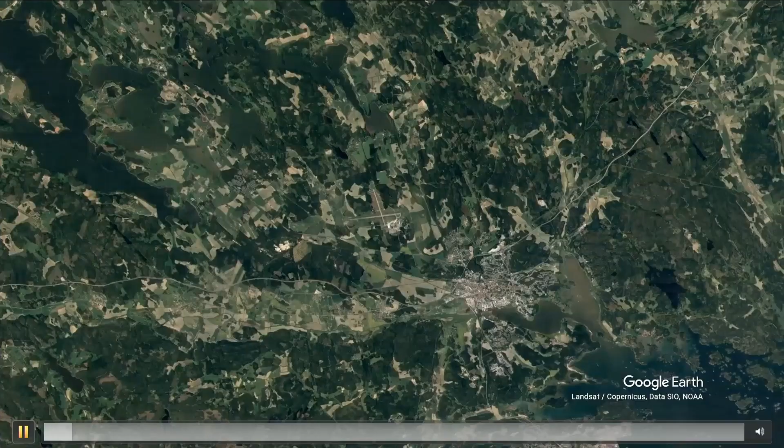Welcome to Nyköping and Skavsta. Skavsta is located just outside Nyköping, about an hour south of Stockholm. The area today is best known for the international airport, but it's about to undergo a transformation. We are developing an entire business area for more than 10,000 jobs, and a new train station with a travel center. The travel center will connect the airport, train and bus, strengthening Skavsta as an important regional node with interconnections in a greater metropolitan area.

For Explore Skavsta as a real estate developer, together with the municipality and the region, this is a chance to be innovative for real, to embrace the future way of making business within the planetary boundaries, and to form a working environment with care and qualities that in itself will become an attraction for a diversity of people and interests. We have already set the basic outline for the area, especially the infrastructure, in a planning program.

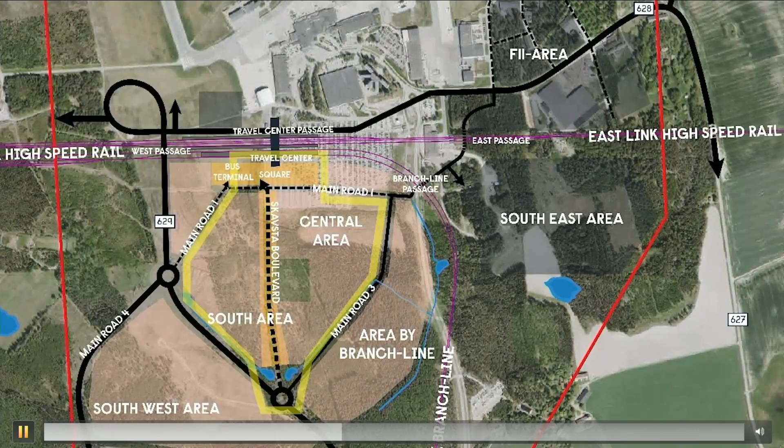The station for the East Link will be an important element for the area. The square outside on the south side therefore becomes a central place. The track and the station are built by the Swedish Transportation Administration and are fixed requirements in terms of height and location. We have also generated vision boards to set the direction for the kind of environment we are looking for. Now it's time to conduct an architectural and urban study in order to design the core elements of this future society and to develop a well-founded architectural vision of the environment we want to create.

The project area today consists of a parking lot and a relatively flat forest land. A height of rock outcrops just east of the future Skavsta Boulevard is preserved and provides a view of the area. The diamond structure of the main roads is given, but the location of the roads is not completely fixed and must therefore be adapted to, for example, travel centers and roundabouts.

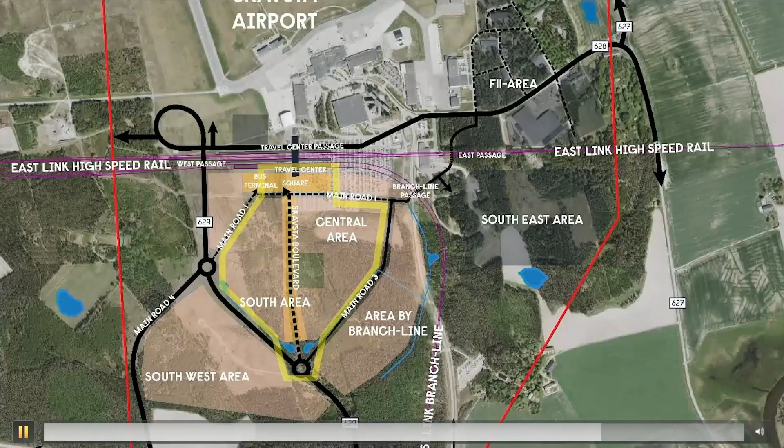The focus of the competition task is to transform the vision of innovative Skavsta into architectural solutions. Our questions concern the concepts of both the transit and the business areas. On site, we are especially looking for solutions on a detailed level for the central future public spaces, such as the Skavsta Square and the Skavsta Boulevard with surrounding blocks.

In Skavsta, we're trying to forecast a development for the next 20 years. For this purpose, your contribution is of great value for us. Welcome to Nyköping and to Skavsta.

Welcome. My name is Tobias Osmark. I'm an architect and a strategist at Nyköpings kommun. After this overview, I think there remain two basic questions.

The first one is very general: why compete in architecture? Competition is for sure very deeply rooted in the subject of architecture, but for us, this question really matters. We don't have an ultimate best solution ready at hand. We need your different professional angles, and in this case, your whole capacity as architects and city planners. Competition is not just about fulfilling the limited program, it is a chance to capture and reveal the whole complexity of architecture. Europan has its own tradition for competitions in this sense, which we are proud to be part of.

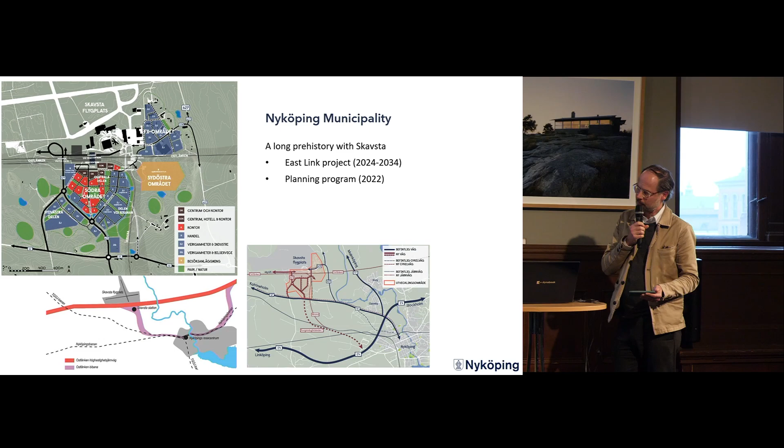We have done our homework. We have worked with the East Link project for a very long time, and next year the construction work begins. It really makes Skavsta the natural south gate to Stockholm, as we saw in the movie, by train, by road, by air, and nearby sea. 3 million people live within 100 kilometers from Skavsta.

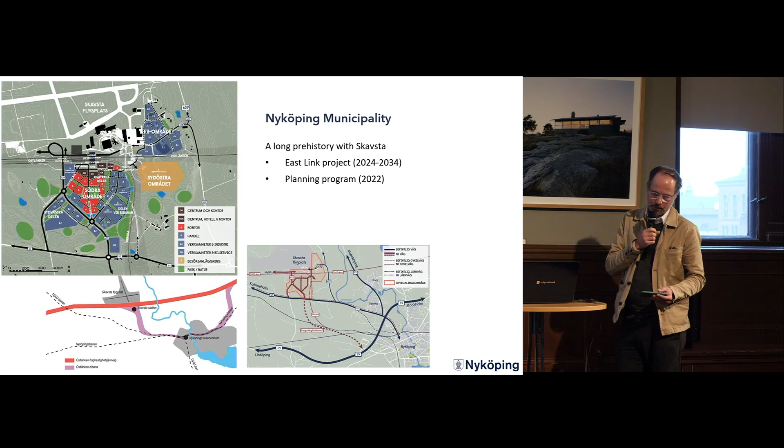The plans for the Skavsta site also have a long prehistory, resulting in the planning program last year. It concerns foremost the heavy infrastructure and other basic conditions.

Our partners are of great importance. We have a highly skillful real estate developer, Explore Skavsta, which is part of the Arlandastad group, with experience of developing the properties around the biggest international airport of Sweden. Our visions are very united with innovation. We really want to challenge the familiar concepts of business districts. To the strong team, we also have Region Sörmland with an office for regional planning and our partner for public transport.

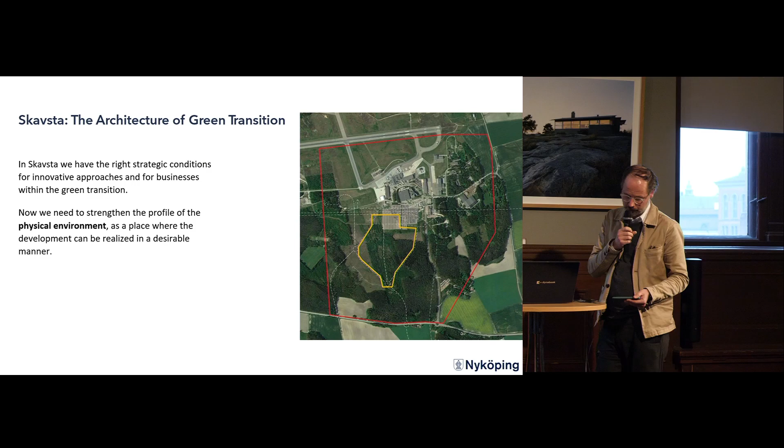This is an opportunity to work with these universal aspects on our local site. We as actors need your attention for the special potential Skavsta has to offer, connected to the local, regional and international contexts. Thank you for listening.

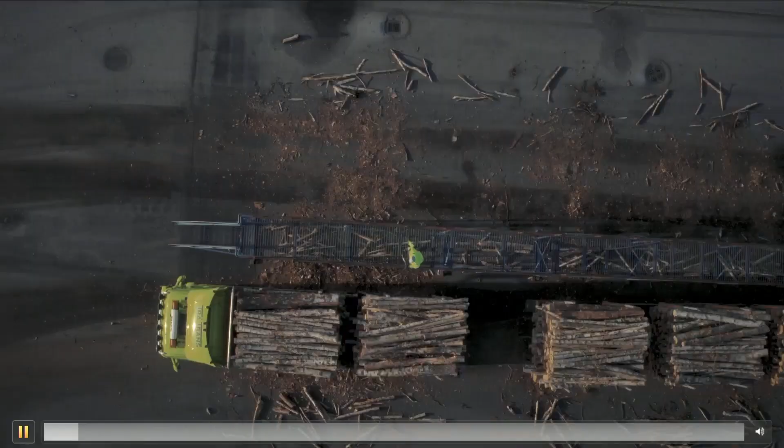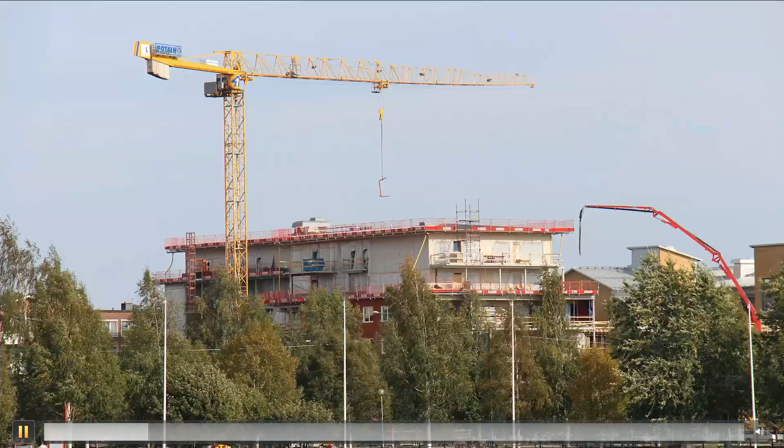Northern Sweden, including the Norrbotten region, is experiencing an outright boom in recent years, as it has been given a leading position in Europe when it comes to the transition to green and fossil-free technology. This has positive effects for the region in the form of economic and population growth, which in turn requires an expansion of housing and infrastructure. The planned construction of the North Bothnia Line, a 270 kilometer coastal railway between Umeå and Luleå, is an important investment to connect the coastal cities along the Gulf of Bothnia.

This project offers great opportunities for urban planning. For this reason, Piteå municipality and the Swedish Transport Administration are participating together in this competition.

We are now at Rådhustorget, which is Piteå's main square. Here, the feeling of the old wooden town of Piteå is well preserved. The square, together with Storgatan, is the town's living room and most important shopping street.

At present, areas west and south of Piteå city centre are characterized by industry and open spaces that lack urban qualities. Directly adjacent to the urban area lies a railway yard, which is only used for freight traffic. Today, the city centre and a popular park next to the water at the South Bay are cut off by a large barrier, consisting of a railway track and a heavily trafficked road.

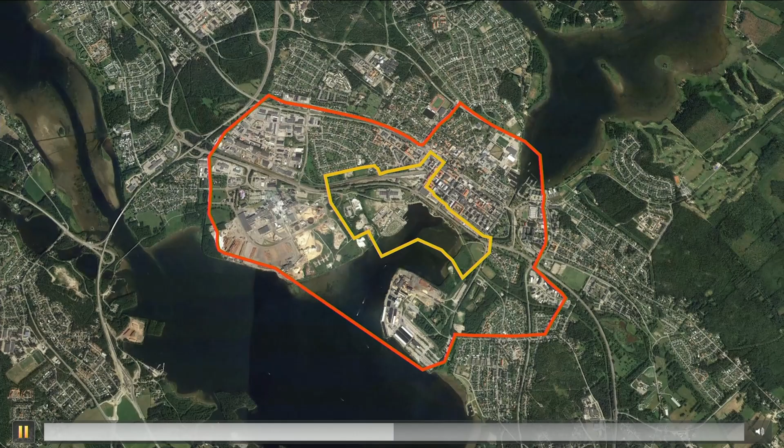The suggested corridor for the future railway track passes in this area between the centre and the water. The main goal is to increase high-quality urban spaces and provide meeting places for all ages. Sustainable choices in everyday life should be facilitated by adding connections between areas and functions that today are separated.

The main question to the competitors is: how can the barriers between Piteå city centre and the recreational area by the water be bridged, while adding a new railway and expanding the city? Where should a transportation hub most strategically be placed to function as a hub for the new area and the existing city? The Swedish Transport Administration is participating in the development of society by creating well-designed environments that are functional, sustainable and beautiful.

My name is Per Sleron and I'm working with the planning of the North Bothnia Line between the cities Umeå and Luleå in northern Sweden. Here in Piteå, the railway will pass through the city centre, and we want it to be an integrated part and contribute to the development of Piteå in a positive way.

It will make it possible for people to choose to travel by train and half the travel time between the bigger cities. And it will make it easier for the industries to choose sustainable transports and link northern Sweden with the rest of Europe. We invite you to be part of development of one of Europe's most growing regions.

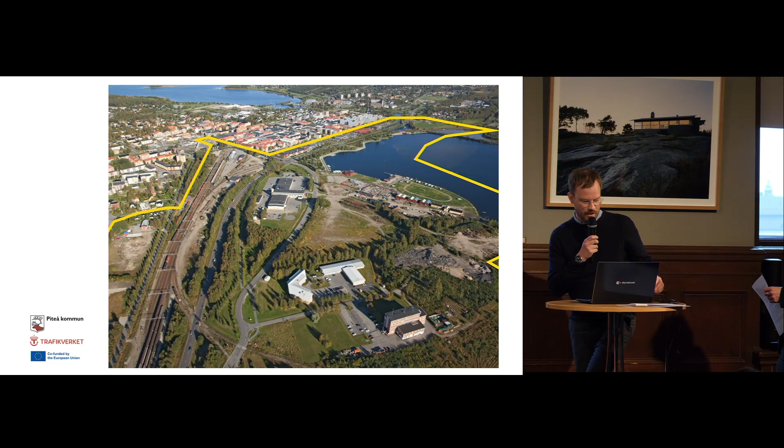The competition area is a part of central Piteå, but has large undeveloped areas. Extensive areas with a high proportion of wasteland and an existing railway yard characterize the area. But the competition area is also a beautiful place with a park in the south port, which is a popular green area that offers a nice view of the water. So I will say it's a place with great potential.

Because of its location on the waterfront and its orientation towards the south, the area has a high potential for being an attractive living environment. Piteå municipality wants to develop the city center. This will become a beautiful place where housing and commerce and business are mixed. It's important to provide green spaces within the existing city as well as in the new quarters. The main goal is to increase high quality urban spaces and provide meeting places for all ages.

The project site has great potential, located close to the sea and the historical center, with small-scale wooden houses along Storgatan and the square Rådhustorget, as well as some new high-rise buildings. The new railway station for the North Bothnia Line will create an injection for the urban development of the area.

The potential offered by the closeness to the sea is today not fully expressed due to the barrier created by the main road Timmerleden and the existing freight railway. A challenge is to create a proposal which will reduce the barrier effects while introducing a new barrier, the North Bothnia Line.

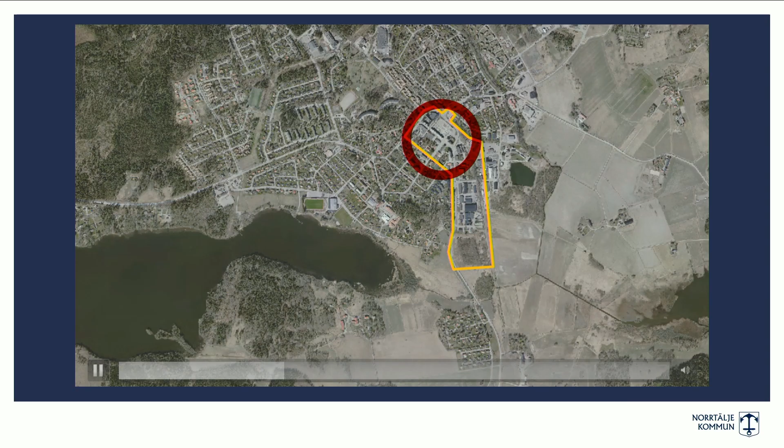The town center lies in the northern area of the site. It needs more visitors and residents to sustain local businesses. The large bus station will be transformed into a mixed-use residential area for both those living in Rimbo and those living around Rimbo in the countryside.

The town center should be integrated with a travel center that is located in the central part of the site. The travel center needs to feel open and safe, both for residents and commuters from outside the town. It needs places for buses, trains, as well as parking spaces for cars and bikes.

The southern part of the site should focus on medium-scale building with houses, services, and commercial. It needs to accommodate the railway tracks coming from Stockholm without creating any barriers in the town.

A few hundred meters to the south lies a new urban neighborhood. This creates an opportunity for this area to have more service and commercial than otherwise possible. The vision for the entire site is to create a mixed-use urban neighborhood with greenery and a focus on sustainability.

Here, pedestrians should be prioritized with street-level activity and vibrant meeting places. Buildings should be built using sustainable materials and methods. Sport, culture and outdoor life is a large part of Rimbo's identity. Any proposal should try to integrate these values.

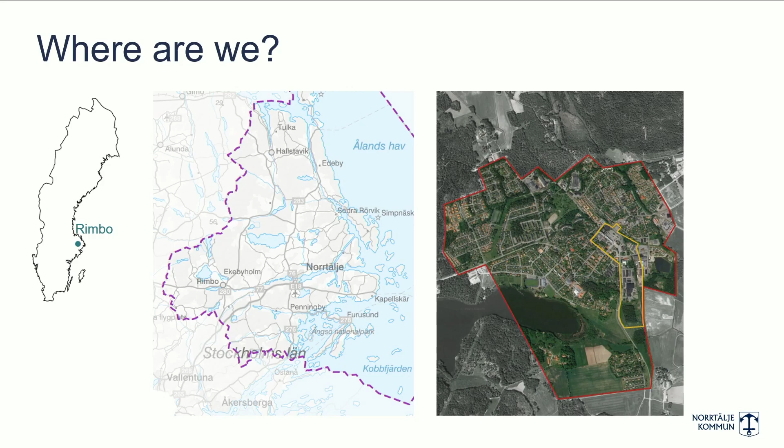It is located inland and has a strong identity connected to its history, the agricultural land, and its industrial past. The construction of a transportation hub for buses and trains that connects to the future extension of Roslagsbanan railway from Stockholm will free up a lot of space in the town center. This will create a unique possibility to plan a new, lively town center that reflects Rimbo's history and character.

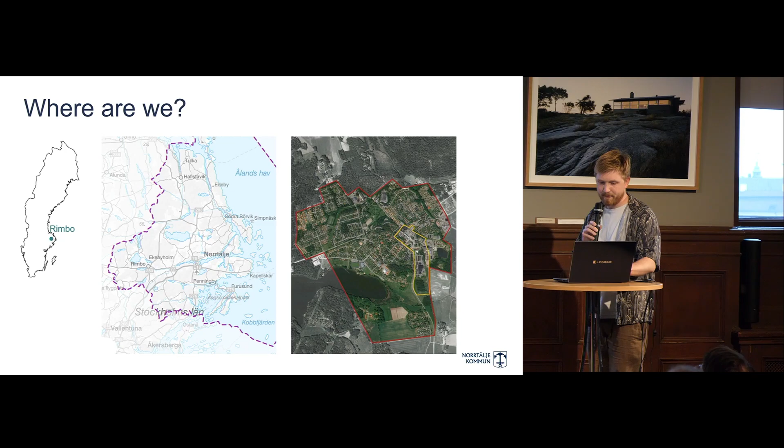Placed at the meeting point between the water and the road, Rimbo early became a marketplace. As the railway was built in the late 19th century and Roslagsbanan railway was completed, Rimbo became an important railway junction. This boosted its industrial, commercial, and residential development.

Most of its center was developed under the influence of the Garden City principles during the early 20th century. Rimbo has been developed in different historical phases, which can be easily read in the city fabric. A large percentage of buildings in Rimbo consists of one-family houses, mostly in wood or brick.

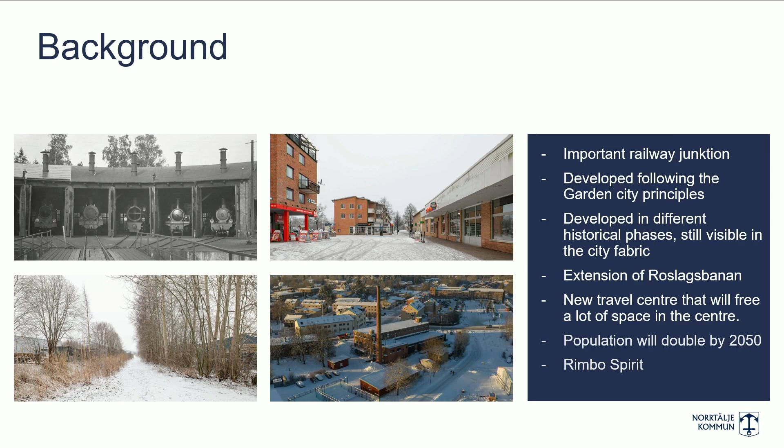During the 1980s, the last railway line to Stockholm was closed. Most of the commuting today is done by car due to a lack of good public transportation possibilities. This influences the town center, which has become unattractive in terms of service.

The extension of Roslagsbanan railway will be a key point for Rimbo's town center. It will connect it to Stockholm and reinforce its position as a node for the surrounding rural areas. Since the 1980s, there is a strong social movement in Rimbo, also known as the Rimbo Spirit, where a committed

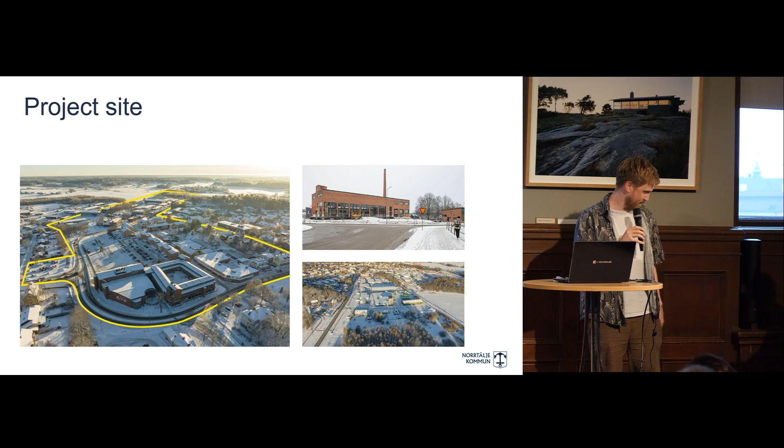3-story apartment buildings with restaurants and cafes on the ground floor. The northeast side of the site is an oversized paved area containing bus and terminal and parking for commuters. This huge empty space is closed to the north by the large brick building, Centrumhuset, which contains a public swimming

pool and a library. This huge empty space I see as most important part of the project site, what you see on the left there in the yellow.

There is a great potential to develop this area with residential, commercial and office buildings, as well as to create quality public spaces with a new transportation hub.

The Galten building up in the right side stands just south of the bus terminal. The building plot, Galten, and its building are proposed to be used as a part of the transportation hub and future final stop for the Roslagsbanan railway.

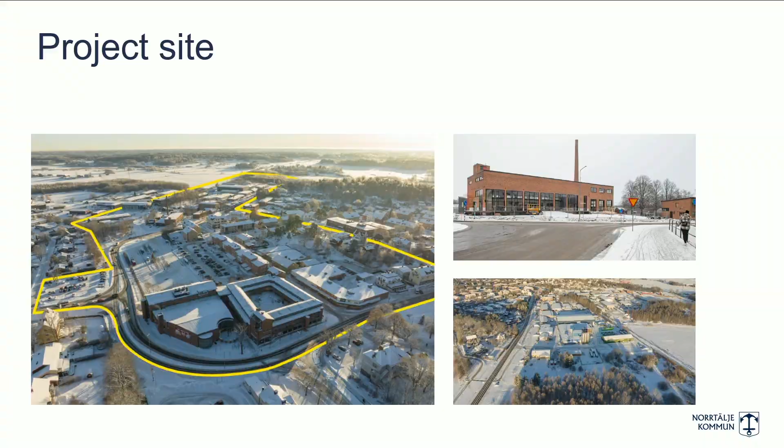Today, the southern part of the project site, what you see down on the right side, is used for light industry and commercial buildings. The buildings are mostly industrial buildings with sheet metal facades that lack architectural values.

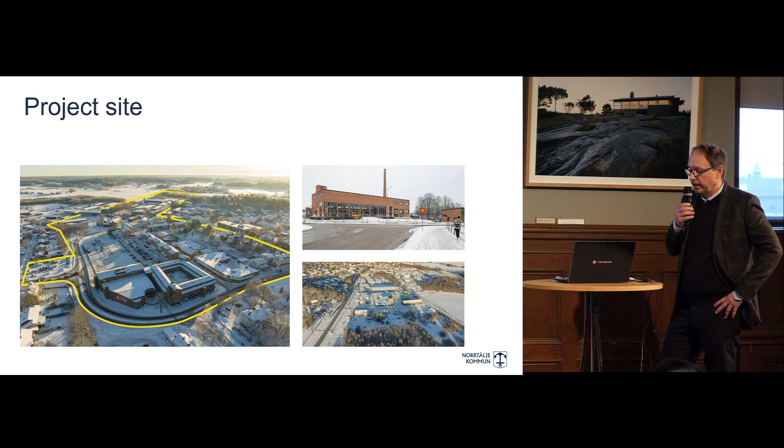This area has the potential to become an extension of the town center southward and form the new entrance to Rimbo from the south, becoming the first impression of the town when traveling, for example, from Stockholm.

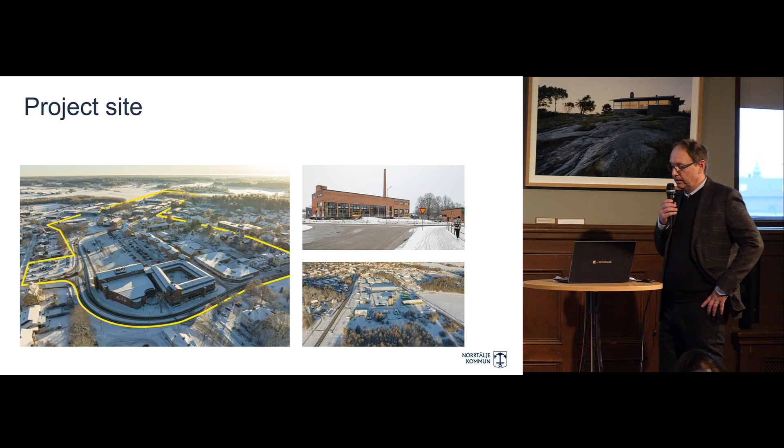In the proposals, the competitors need to show the extension of the railway to the town center, as well as the location of the new transportation hub. However, there is room for the competitors to develop their ideas for Rimbo's new town center. The focus should be on sustainable development and finding a new identity for Rimbo as a place to live, work and visit, reflecting the town's character.

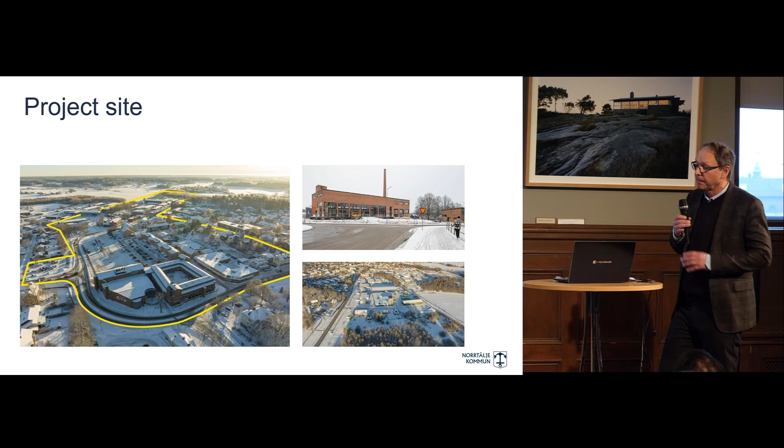And here are the starting points that I just talked about: a new vibrant town center that reflects Rimbo's identity. That's the main cause of this competition. Thank you.

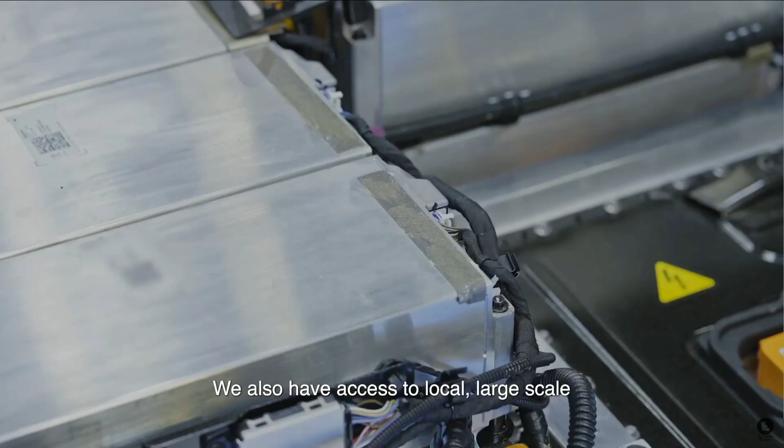We also have access to local, large-scale renewable energy that enables an electrified society. It is one of the reasons why Europe's largest battery factory is emerging here, creating lots of jobs and generating positive ripple effects on society.

So the jobs are here, but we also invest a lot in leisure activities and cultural offerings for children and adults, and new restaurants are being established all the time. We need to create attractive living environments so that people choose to move here and stay, and we need to act fast. One of the areas we have in mind for development is an old industrial site.

We believe this area has the potential to be transformed into a vibrant neighborhood where people, businesses, and nature may coexist.

And we would love your help. This is the Scharins area. It was named after the family Scharins that started this industry here, a wood industry or pulp production industry. It has been an industry that was in work for at least 100 years. It has a scenic location next to the river, and beautiful nature just around the corner.

It's also close to the new industrial site as well as the city center. We foresee that this area has the potential to build at least 1,000 or maybe up to 3,000 new homes, and we also think it's possible to make areas for recreation and parks and such. But the location is associated with one major challenge: earlier pollutions from the factory that was located here. Despite extensive cleaning efforts, one section of the land does not meet Sweden's strict requirements for safe housing.

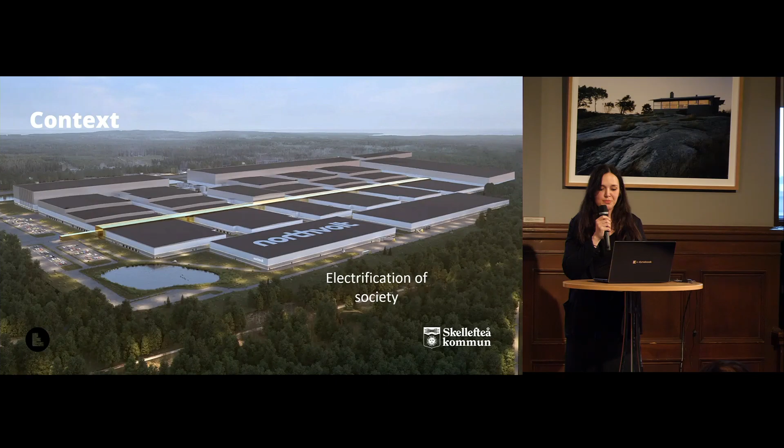The establishment of Europe's largest battery factory is in Skellefteå, and it's expected to generate 10 to 15,000 new jobs. To fill all these job positions, people need to move here from all over the world, since unemployment is already low in Skellefteå. And Skellefteå wants to create attractive living environments.

They can offer unique natural environments. Skellefteå already has a lot of forest, a long coastline, many islands, rivers, streams, and lakes. And Skellefteå is very proud that they already have these culture and leisure activities.

One example of these investments is the Sara Culture Center, which is one of the world's tallest buildings constructed entirely in wood. And they also plan to establish a new design center here in Skellefteå, which will be a national node for architecture, design, form, and handicraft.

And Skellefteå is very proud that Time magazine named Skellefteå as one of the 50 greatest places in the world in 2022.

And to move to Skellefteå, you also need a place to stay, and the demand for housing, as you heard in the video, is enormous, and thousands of new homes must be built every year. And all this must be done in a sustainable way, of course. This is why Skellefteå wanted to join Europan.

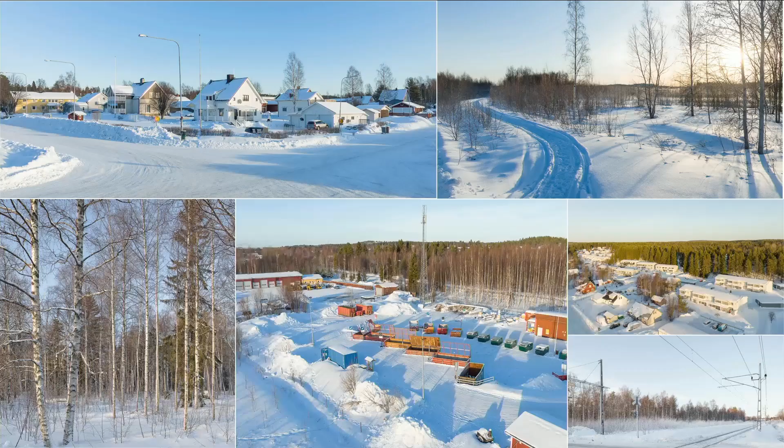And here you see some images from the site in winter. It's a lot of winter in Skellefteå.

Some of the questions that Skellefteå would like answered is: what innovative solutions exist to build a safe residence despite the partly contaminated ground? What can we learn from other locations with similar challenges? This is, as I said before, the main challenge. And how can we build on the exclusive location next to the river and the creation of recreational opportunities, such as canoeing, swimming, soccer, or golf? And how can accessibility to the water increase for the public?

Thank you. Skellefteå looks forward to receiving inspiring ideas and working together with young talents. Thank you for your attention.

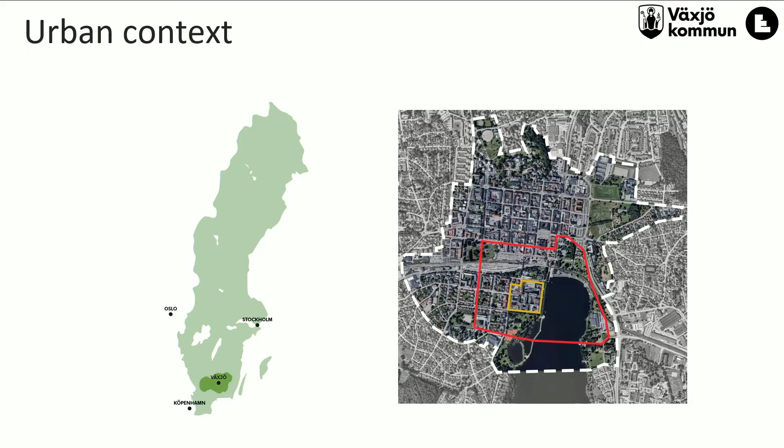So, in the heart of Småland lies Växjö, surrounded by the region's characteristic forests, small lakes, and stony fields. It carries a strong entrepreneurial tradition. It is the commercial and cultural center of the region, and it also accommodates the region's central hospital, the site for Växjö's entry for Europan 17.

Växjö is an old town with a rich history. At the beginning of the 11th century, a couple of farms were located in the place that later would become Växjö, the town with a marketplace where two roads met by the lake. The name Växjö means road and lake.

The city's layout is of the classic 17th century grid style, and the city consists of opposites that meet and unite. In the year 2018, Växjö got awarded for being that year's architecture municipality in Sweden.

Växjö is perceived as safe, and gives its residents the possibility to meet and thrive. Environments for a living urban life provide possibilities for people to meet, which can strengthen development of society and democracy. Växjö is an attractive place for innovative businesses and associations that contribute to high and sustainable growth.

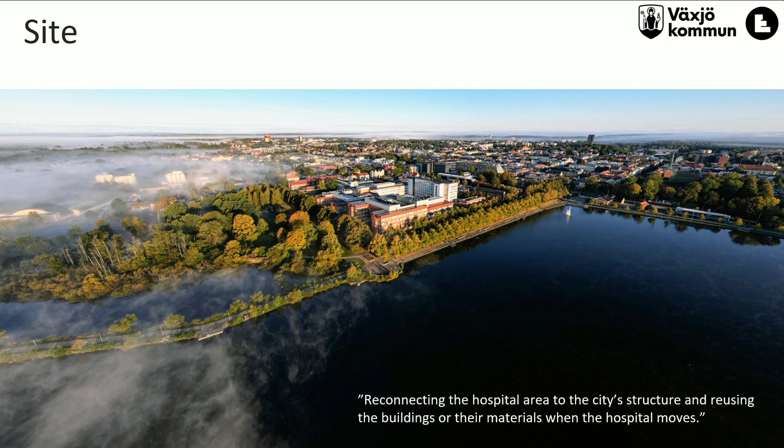The vision and expectations for the project site is that many nodes and public functions will be developed, which will contribute to a living city. A mixed-use land use plan has been proposed for the site. It may contain some housing, however, the ground floor should be entirely public. The site's unique location demands public functions and content that are valuable for Växjö as the region's capital.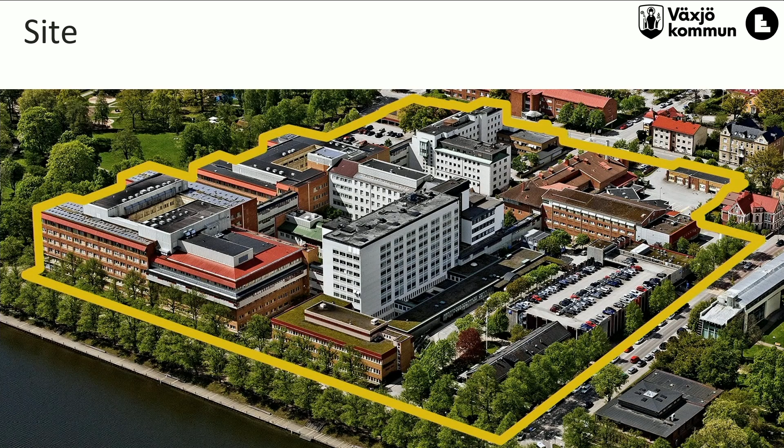Strandbjörkstaden, as the area is called, consists of hospital buildings from the 20th century. The block is centrally located next to Växjö's historical and commercial center. The communication center is in the north, and Växjösjön and its promenade in the east, the park Strandbjörken in the south, and the garden city Söder in the west.

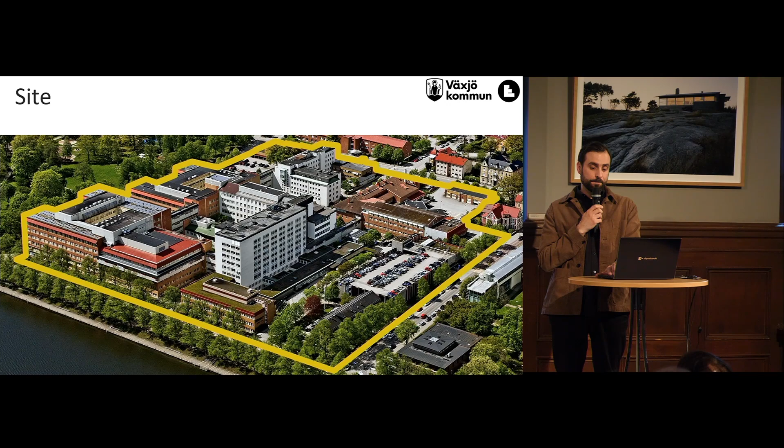In the future, the hospital will be moved to a new building in a new location outside of the city. The buildings that remain will no longer be used by the hospital. With a very central location, the buildings have the possibility to develop Växjö in the right direction for the future.

The competition task is to investigate how the structure within the hospital block can be developed to create better connections with the rest of the city. How the existing buildings or the materials can be transformed or reused, and to suggest a new programmatic content for the site.

The questions to be answered are: how can the center of Växjö, with its history, culture and commerce, be further developed within the competition site, with regard to living environments and sustainability in all dimensions? What does the city center of Växjö need to continue to be a lively and attractive place for its residents in the city and the region, and to attract many visitors?

Businesses, streets and squares, what additions does Växjö city center need? And construction technology, what needs to be added and what needs to be preserved? Thank you very much for listening.

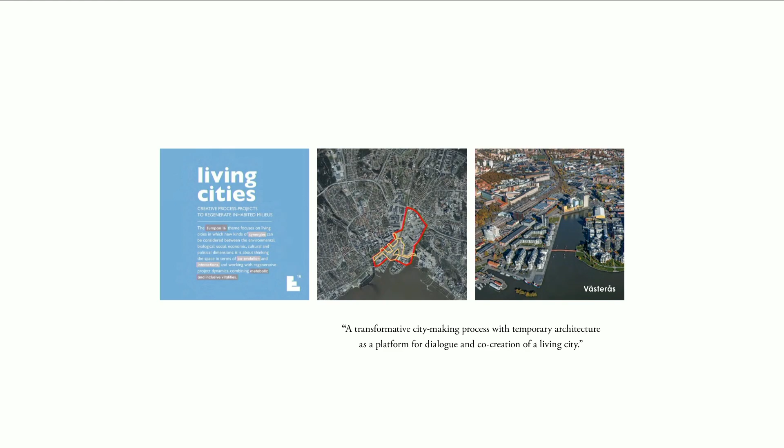And this was our proposal, Landscapes of Encounters, an invitation to a multi-species city. And this was our definition of a living city: how do we invite others, other species and other actors to become a part of a coexisting and co-shaping of a society, a future society?

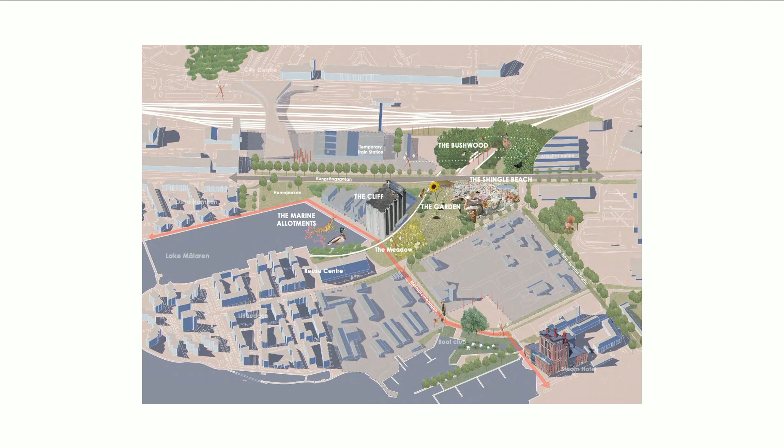So when we were at the site, we tried to find the qualities already existing and see it as a landscape, opening up a way of thinking about how we could reintroduce habitats on the site in such an urban environment. And we had a toolbox that helped us.

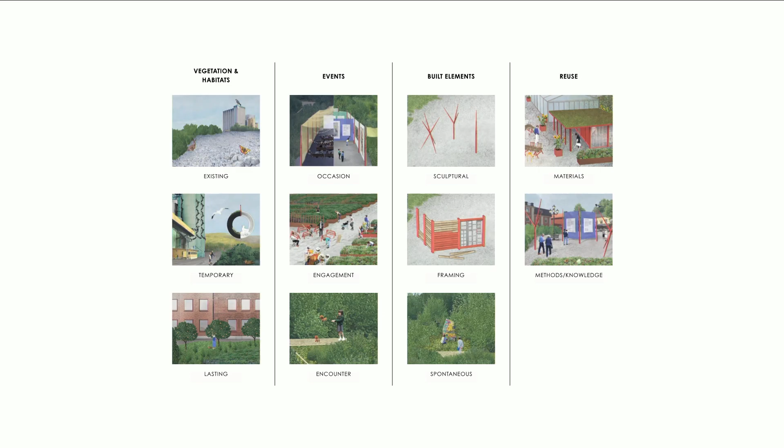What we aimed for was to use the vegetation and habitats already there and try to enhance them, and also work with events, built elements, and reuse strategies. And this was a process.

This was one of the sites, the bushwood as we called it. Our method was that we worked with large sections instead of drawings, and we tried to capture a new perspective, dreaming of what this place could become.

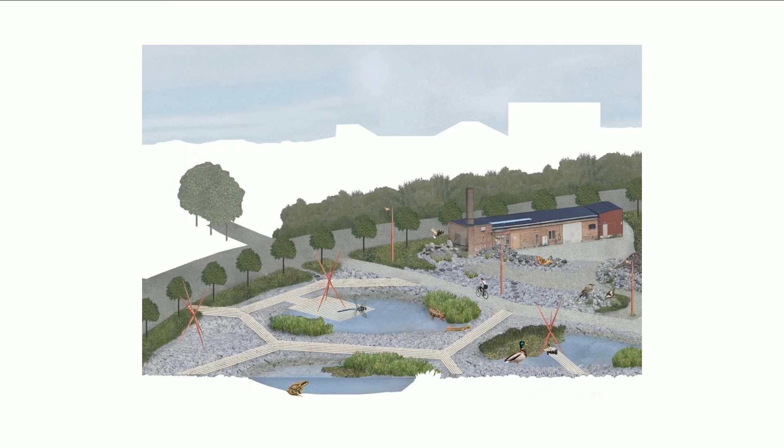And this is a very good thing with Europan, because if you read what they ask for, it's three posters and a text, and you're able to choose whatever kind of drawings you like and tell the story of your site. We would very much like to use that opportunity to talk about architecture and time and these topics in other ways as well.

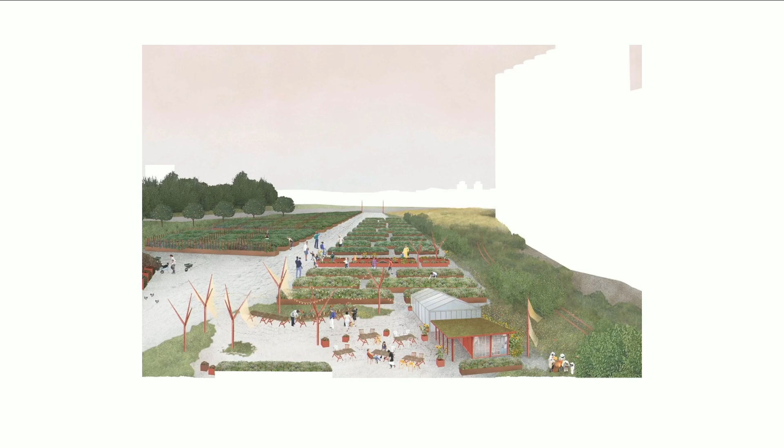If we're about to change how we think and how we construct a society, we also need to think in new ways, and we need new ways to show or talk about architecture as well. And dream about what the urban fabric can host, what kind of landscape can we have, and is it just for us humans, and how could we invite others, non-humans as well, to be part of it and build relation?

Because our view is that if we should start to care and be able to think about how to live sustainably, we also need to be surrounded by other species, other processes that aren't humans that decide, and that aims for another perspective.

And maybe stop here, and also say about the Västerås site, that we very much appreciate that this is like a window in time. They have a plan for what's going to happen, what's going to be built in 20, 30 years.

But this is a window in time in which we can try smaller processes in temporary architecture, where we can do trial and error, and you're allowed to make mistakes as long as you keep going and try again in different ways. And very briefly, at the end, we are now working together with a winning team at the site, doing some temporary installations and activating this place.

So we were in Västerås at a workshop in March, a month ago. And also had contact with a reuse center next to the site that we didn't know about, that had opened this spring. Amazing. And here are all of us.

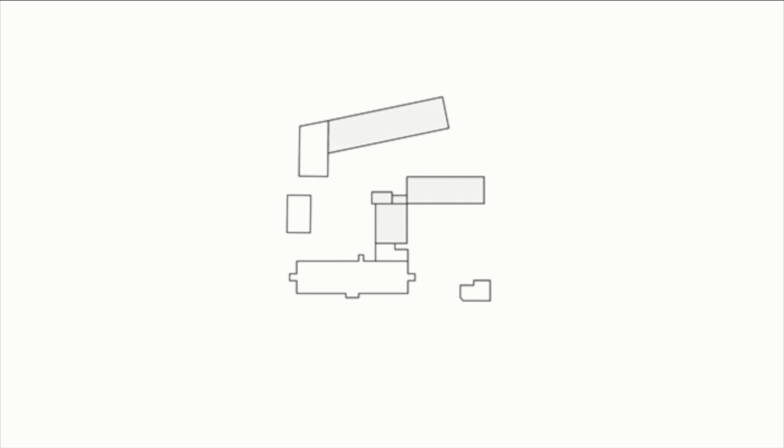These are the existing buildings on the site, and some of them were going to be left empty. Those were the ones we focused on in the competition, and we converted them into new use.

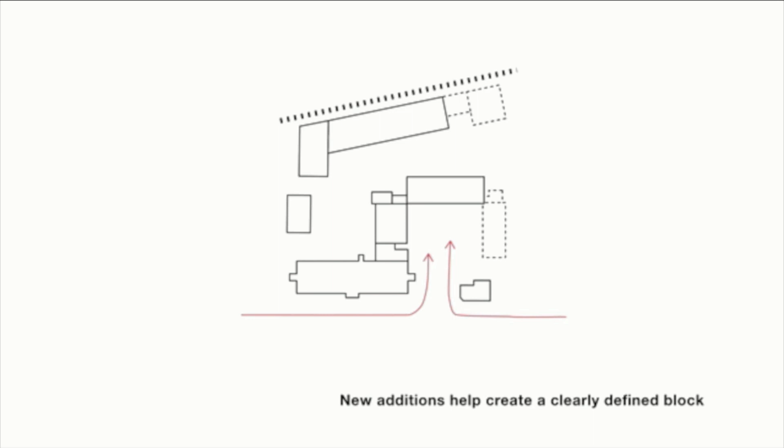We also proposed 2 new additions that helped create more defined urban spaces, creating a formal square in the front and an informal one in the back. You can say we're continuing a tradition of squares facing the main street.

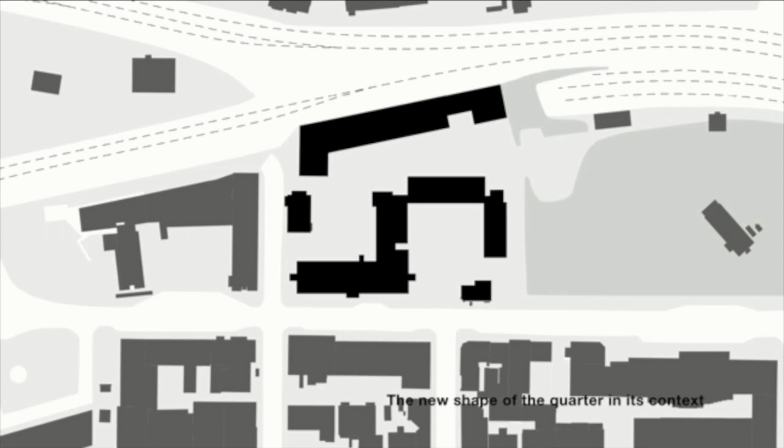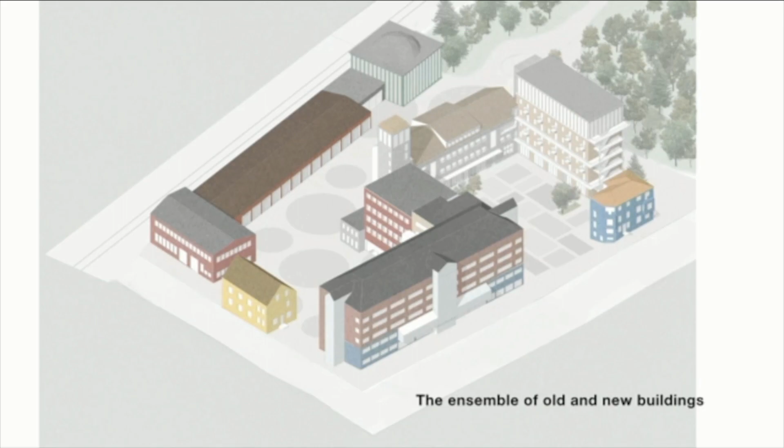We really liked the old tower in the middle of the block that inspired the design of our 2 new additions. We see the whole block as an ensemble of old and new buildings creating a new whole block. We also worked a lot with the scale of the new buildings, and reused different architectural elements found in the existing buildings on the site.

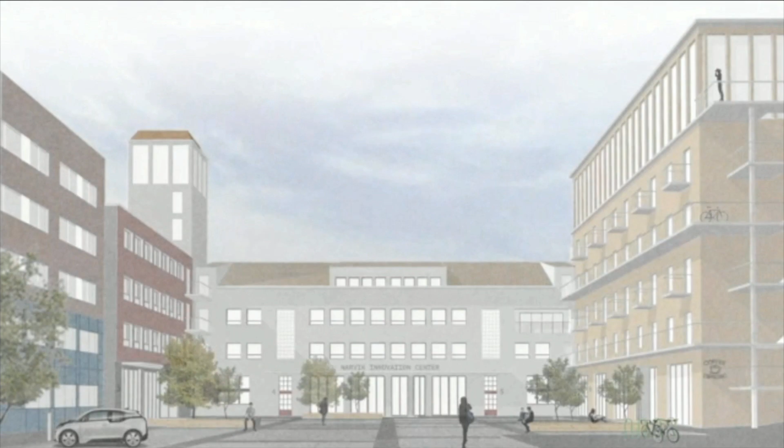With our addition seen to the right, we create this defined urban square. We think it has the potential to become the entrance to the whole block.

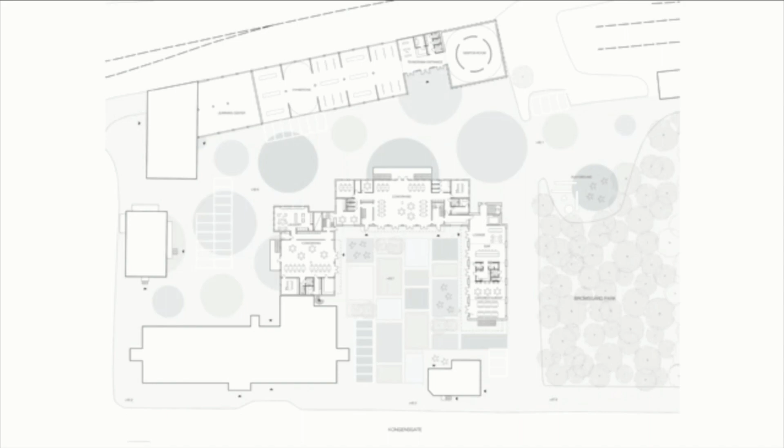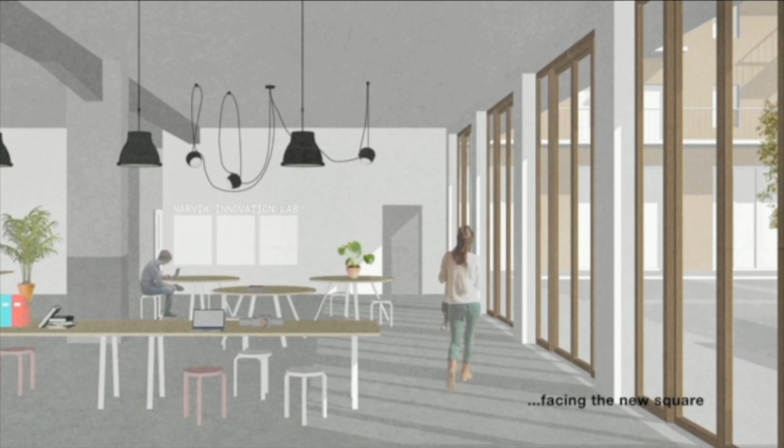This is the ground floor plan with new use. In our new addition, we proposed a restaurant and entrance lobby. In the old workshop garages, a science museum. In the old fire station, co-working facilities. So with small means, we transformed the old garage for the fire trucks into a new creative hub that faces the square.

In the floors above, we proposed housing for the young, which was in the brief from Narvik as well. We had 3 different types of living conditions: collective housing, studio apartments, and duplex apartments facing the park.

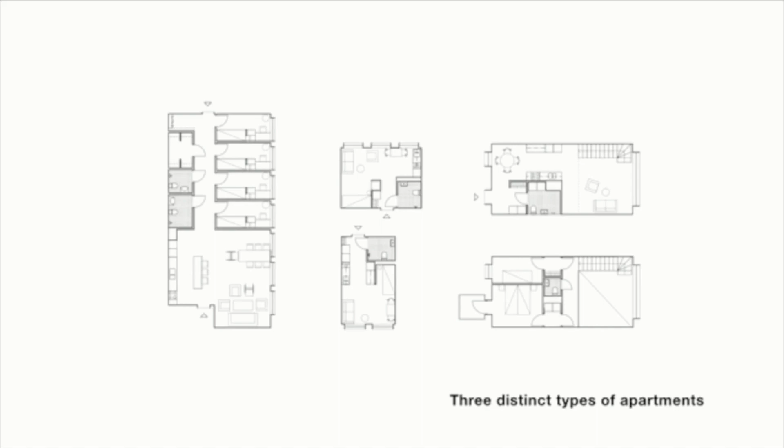The studio apartments, here you see them a little bit better. We also wanted this mix of typologies to offer different qualities to attract people with diverse preferences, like these duplex apartments with a kind of art studio feeling.

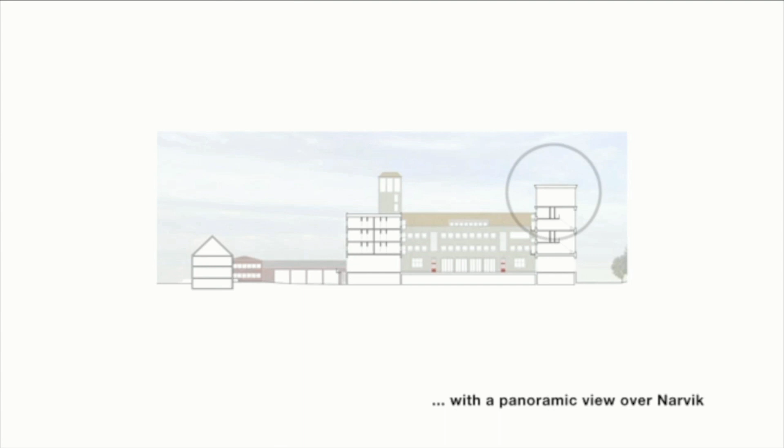Above the apartments, we proposed a flexible hall. We wanted this top floor, with its panoramic views all over Narvik, to be a public place and give something back to the people in Narvik. We think it's a memorable place, thought of as a showroom for innovative ideas.

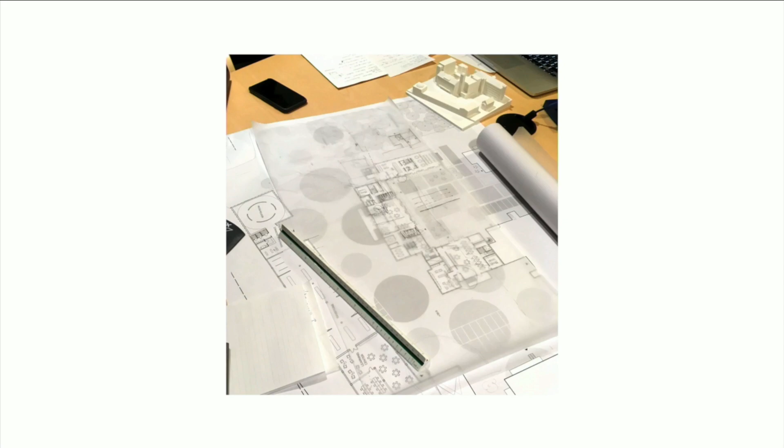After we won, we started working with the municipal real estate company. We visited Narvik, and these are some photos from our site visit. We had workshops together with the client, developing the project. Here are a few examples of what we did after winning.

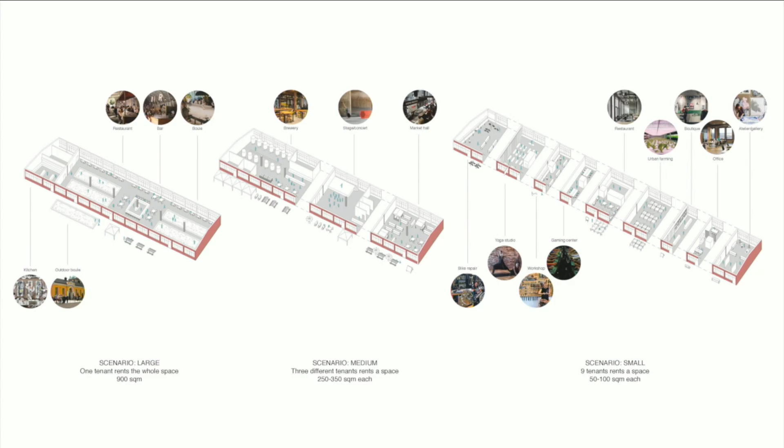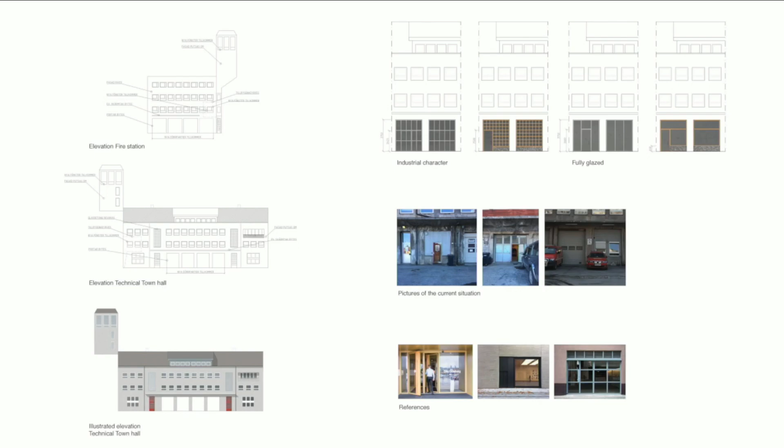We evaluated the existing buildings and programmed the different spaces more in depth, looking at different opportunities. We also looked at substituting or repairing parts of the existing buildings, especially one facade that was really in need of change. So we looked closely at that.

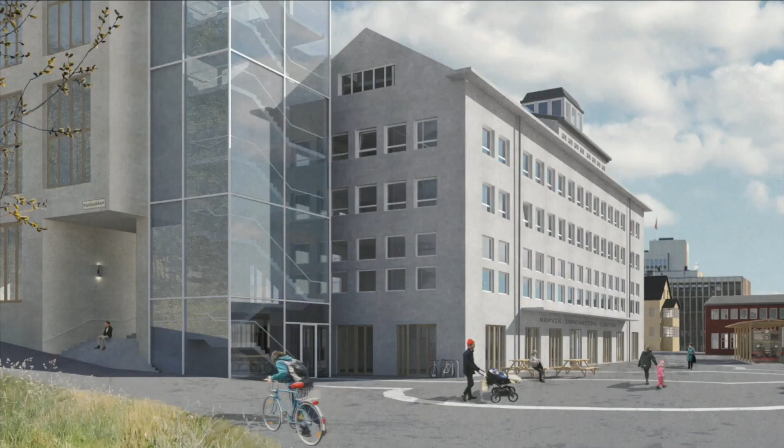This was a view from the informal square in the back that we developed after the competition, but you can find more information on our website. The current status of the project is that it's paused, because the fire department that is there today has been delayed in moving out, and we can't start before they are out of the building. Thanks for listening.

Thanks so much, Matilda and Martin. Very inspiring. And now the last lecture for Europan today. It's by a Danish architect. We always call them the Danish teams who always win on Swedish sites. You got first prize in Karlskrona, Europan 14, and then first prize, Europan 15, Visby. So tell everyone about your tricks.

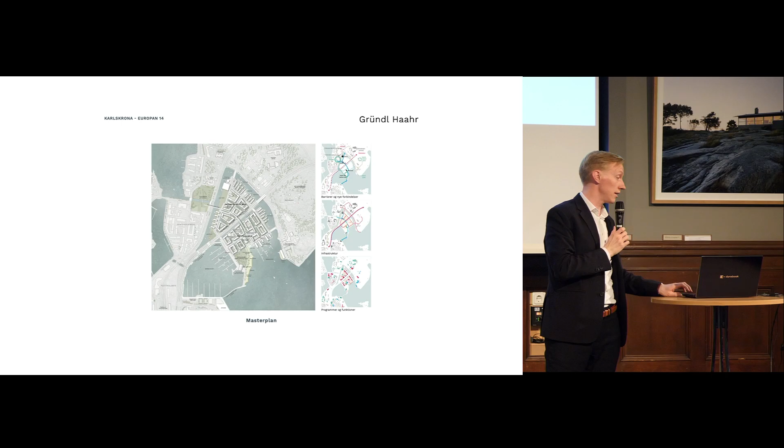We looked at the old map, and as I explained, this area was once open water, but there were these three holme, these three islands. We took that idea and reinterpreted it into these new three islands, as you see on the right side, making the master plan look this way.

This master plan for the area is 200,000 square meters of building structure, but mainly it's a landscape project. It's a landscape project giving the city back to the sea, making the entrance a journey through, across islands, across bridges, step by step into the sea, into the Karlskrona main island, Trossö.

After the competition, we developed a very nice relationship with the municipality and their employees. Right after the competition, we had a smaller task detailing the area, and then we got a task working with the area on Trossö, where the station is located, called Kungsplan.

As part of that, we worked with the infrastructure. There is this large infrastructure going through the area called the Österleden, and that is the main entrance to the city, so it's a really important entrance. But due to some technical issues, it has to be redesigned partly, and they want a design, a vision, a strategy for how to make this redesign.

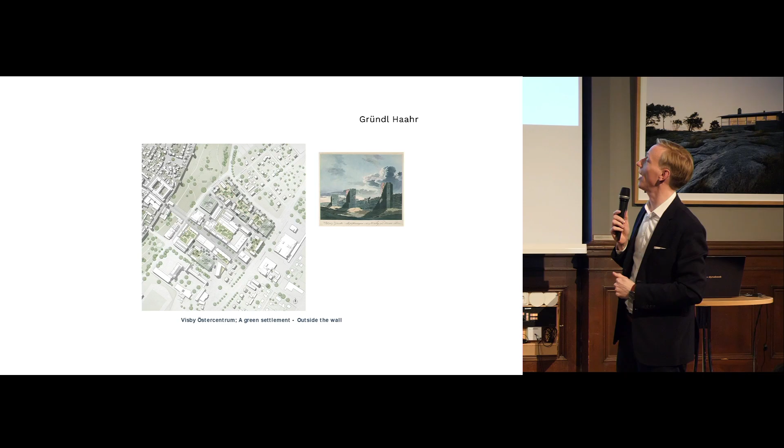So that was Karlskrona. Just briefly, we also won the competition in Visby, a very inspiring site. We have not had so much work on it afterwards, but we hope to restart that. So these two projects have been the starting point for us to establish our firm.

In 2020 we established our firm and got a grant from the Danish Art Association, and in the past two and a half years we've won a couple of competitions we are currently working on in Denmark and Sweden. So thank you for your attention.